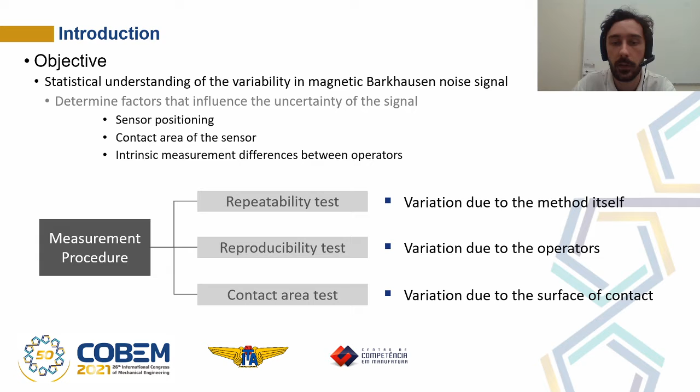But first, let us understand how the magnetic Barkhausen noise phenomenon and technique of measurement works. The phenomenon happens by inducing discontinuous changes in the magnetization of ferromagnetic materials under the influence of a continuously variable magnetic field. The output from this effect, which is the signal strength, is directly affected by the hardness and residual stress of the material being evaluated.

So the Barkhausen noise technique is emerging as a highly capable method of evaluating microstructural parameters in real time due to its non-destructive characteristic. Then there is a real need for a quantitative understanding of the correlations between parameters that influence the Barkhausen noise signal that are not correlated to the material.

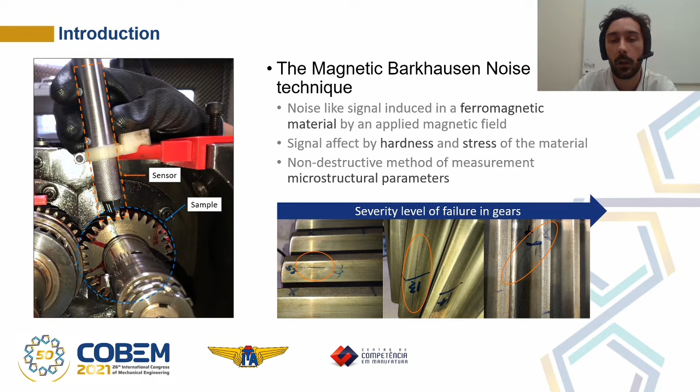In the current days towards which the automotive industry is heading, electric vehicles are gaining the spotlight, and with them, new drivetrain concepts are needed to overcome the challenge of system efficiency, noise, and vibration. Additive manufacturing may be the solution to overcome the limitations of conventional manufacturing processes, with its benefits of geometric freedom and new material possibilities.

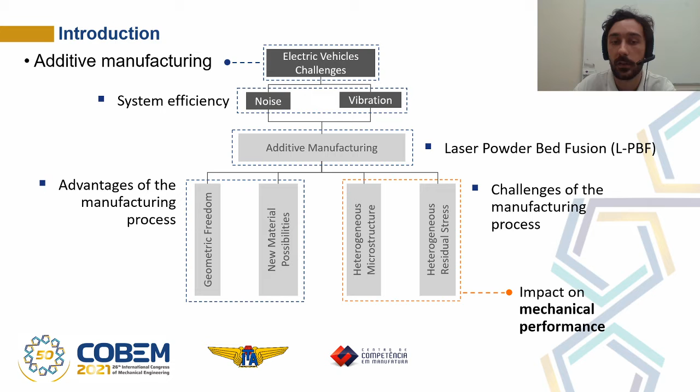However, additive manufacturing processes such as laser powder bed fusion induce heterogeneous microstructure and residual stress that may impact the mechanical performance of the components.

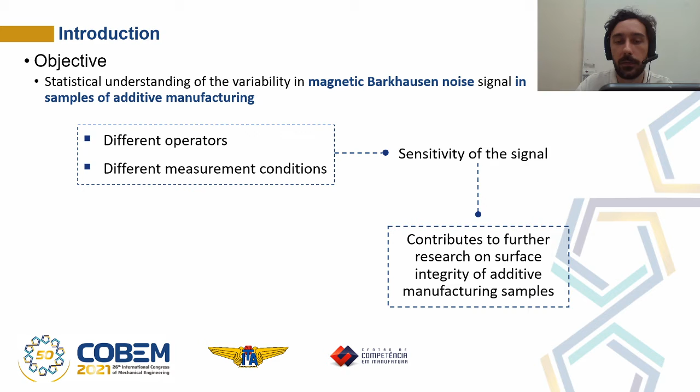The present study, therefore, aims to study the main parameters that influence signal strength, comprising an analysis with different operators and different measurement conditions. Repeatability and reproducibility tests collaborate to increase the spectrum of non-destructive surface inspection solutions, helping to investigate the robustness of the signal. Therefore, this study, which aims to analyze the sensitivity of the signal, also contributes to further research on the surface integrity of additive manufacturing samples.

I will approach the materials and methods section in a way that is divided into three parts. We will discuss the equipment used for the measurements, the samples used in the test, and the method of measurement.

First, the analysis requires the use of a Barkhausen noise signal analyzer and sensor, which is the Stresstech Rollscan. The equipment is used for controlling surface quality and investigating near-surface defects in terms of residual stress and microstructural changes.

The measurement process starts by inducing an alternating magnetic field, which tries to align the magnetic domains of the material in the direction of the field. This sudden change in the magnetization induces electric pulses, which are called Barkhausen jumps. These jumps are captured by the Rollscan, which amplifies, filters, and displays them on the device screen.

The range of the equipment settings used for the Barkhausen noise measurements include the waveform, the voltage and the frequency of magnetization, the filter of the signal, and the output is displayed in terms of the magnetoelastic parameter.

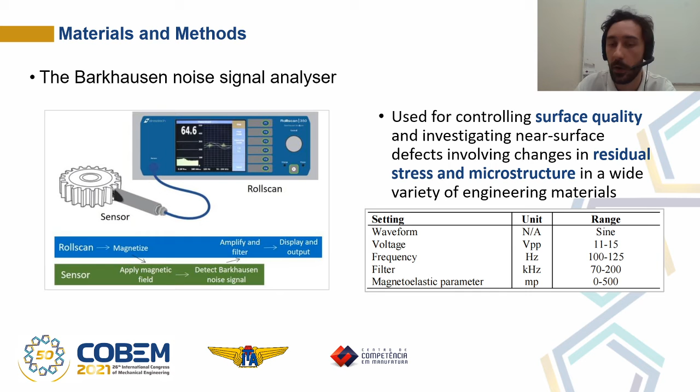With 3 specimens of additive manufacturing made with laser powder bed fusion technology, which are 2 rods and 1 gear, the spur gear used for the measurement has 21 teeth, 2.85 millimeters of normal module, 20 manganese chromium 5 is the material, and the metal powder has a median size of 29 micrometers. The 2 rod samples have a diameter of 9.53 millimeters and a length of 76.2 millimeters.

The laser powder bed fusion process was performed in the Alkimat LaserFunde200 machine with 200 watts of power, 550 millimeters per second of scanning speed, 0.1 of hatch spacing, and a powder bed of 100 degrees Celsius, a deposition angle of 14 degrees, and the filling strategy was islands of 5 millimeters.

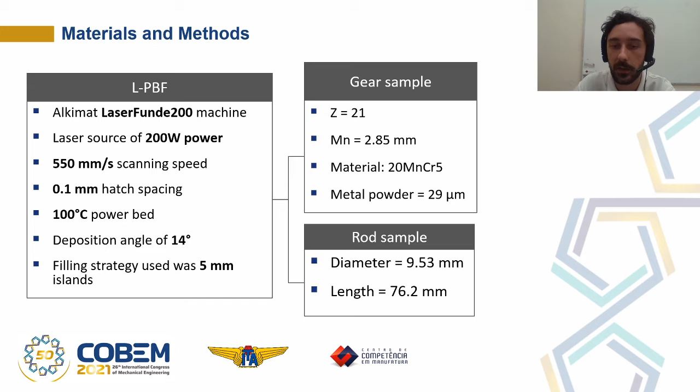In order to estimate the repeatability and reproducibility of measurements with the Barkhausen noise sensor, the experimental procedure was developed to observe the variation due to the measuring process when the operator measures the same part several times, and to observe the variation due to the operators by comparing the results of 3 different operators.

First, in the repeatability test, the operator measured the 21 tooth gear sample in 3 series of test repetitions, N1, N2, and N3. To also ensure the randomization of measurements, the order of measurement of the flanks was randomly defined for each operator.

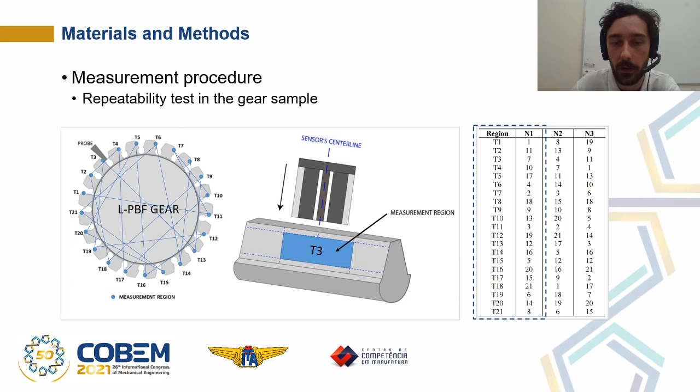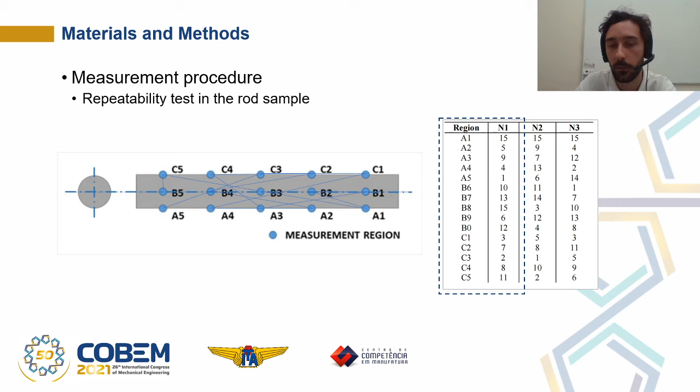Repeatability tests were also performed on the rod samples. The procedure followed the same logic for the 2 rod samples. Each operator had to measure the specific region 3 times in 3 series of repetitions, N1, N2, and N3.

The reproducibility test was developed to compare the variation of results between 3 operators. To achieve this goal, it was defined that each operator would perform 10 measurements on each sample in identical predetermined regions. 10 measurements were performed in region T2 on the laser powder bed fusion gear, 10 measurements in region B3 on the rod as built, and 10 more measurements in region B1 on the other rod, stress relieved, totaling 30 measurements for each operator.

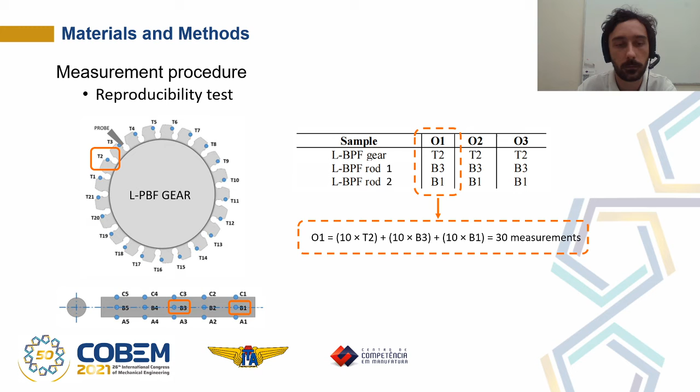To estimate the quantification of its influence, the sensor contact area was varied on a flat ferromagnetic surface to block its area of operation in terms of the ideal measurement area. The variation of the contact area of the sensor with the sample was performed as a function of the center line of the sensor. The contact was blocked using an insulating rubber-based adhesive tape.

For these tests, the contact area was varied as a function of the percentage of the sensor surface area in contact with the sample. These tests were divided into 100%, where the sensor surface area is completely in contact with the sample, 50%, 25%, and 0%, where the sensor surface area is completely obstructed by the rubber-based adhesive tape.

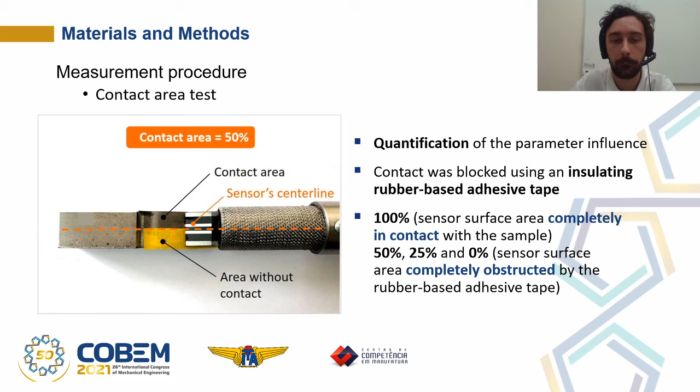The radial graph illustrates the geometry of the gear, and it can be seen that not only are there points with greater signal divergence between the three measurements, but also regions of the sample with different absolute values.

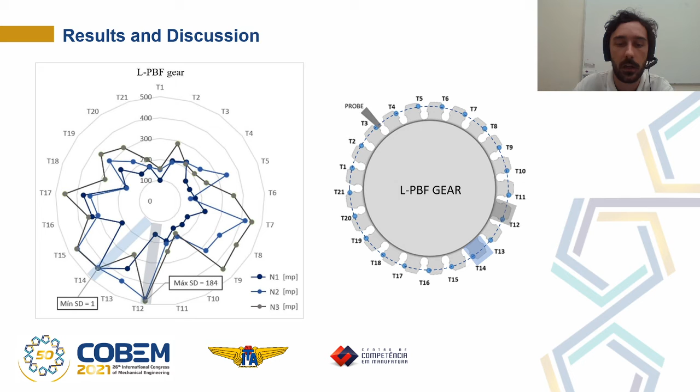The results demonstrate the difficulties of repeating the measurements on a complex geometry, as well as the metallurgical differences that influence the magnitude and variability of the signal. In the measurements performed on the gear, the largest standard deviation found was in the T12 region, caused largely by the disagreement between the N1 test series and the N2 and N3 series, which yielded close results.

For the results of the two rod samples, the larger standard deviation is caused by the divergence between the first series of measurement and the other two, showing the signal uncertainty even in a more controlled geometry.

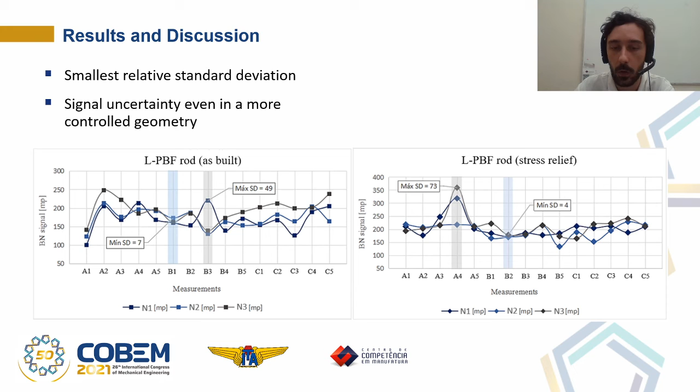But to better illustrate the results, the average of the repeatability test was expressed in terms of the percentage of standard deviation here. The first evidence of change in the sensitivity of the Barkhausen noise signal occurs when considering the presence of involute geometry on the flank of the first sample, whose signal sensitivity was 20% higher than in the rod samples.

This fact demonstrates that factors such as the sensor's contact area with the sample surface and the positioning of the sensor itself can cause significant signal deviations in the results.

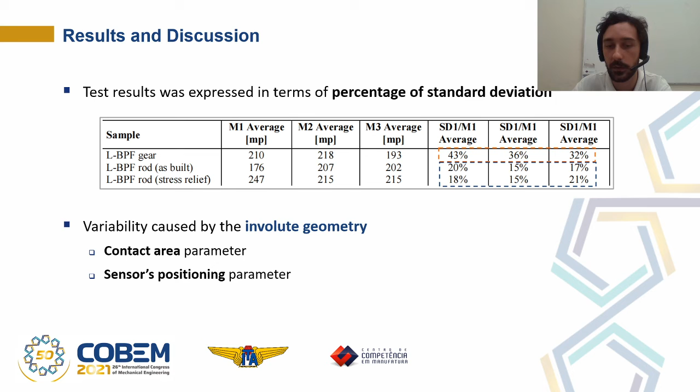Observing the results for each operator, it can be seen that the greatest variation of the signal in the sample with involute geometry is a trend, showing the difficulty of measuring due to geometry.

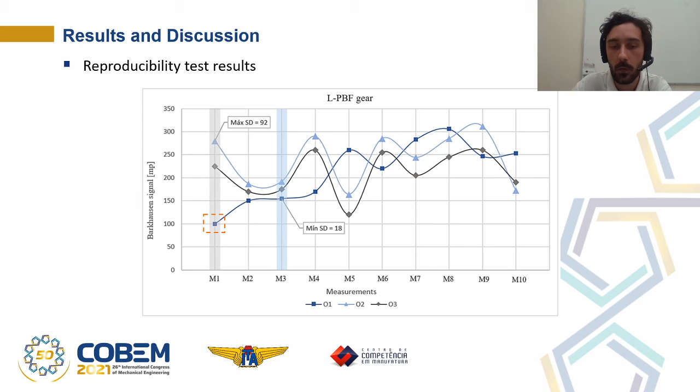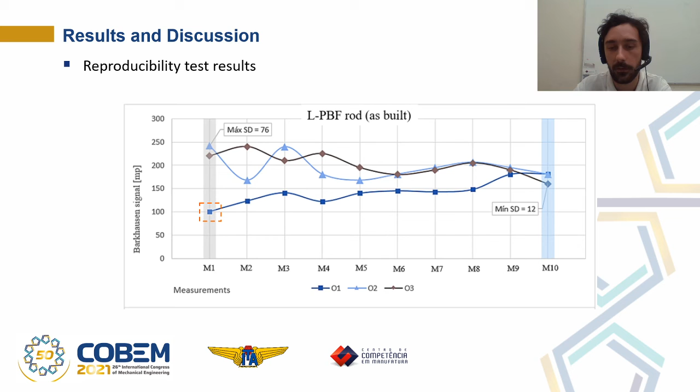The maximum value of the standard deviation for the gear sample is 92, and the minimum value of standard deviation is 18. For the first rod sample, there is a divergence in the first measurement for one of the operators, and the maximum value of the standard deviation is 76, and the minimum is 12. For the second rod sample, the minimum standard deviation is 1, and the maximum is 28.

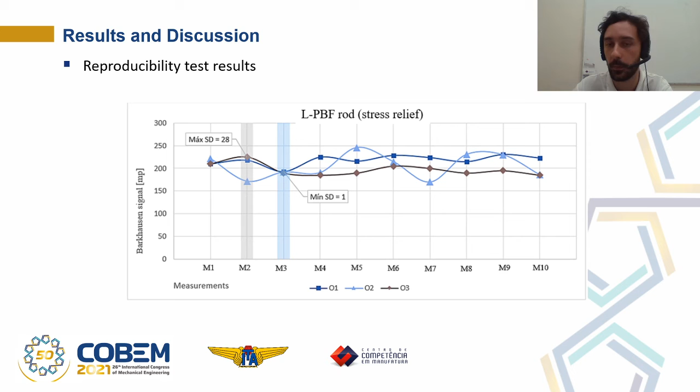This shows that surface geometry is a very important parameter when evaluating the statistical variation of the Barkhausen signal. Summarizing the results in three tables related to the absolute mean of the signal and the standard deviation, it can be seen that the rod geometry contributes to the signal having less variability, and it can be estimated that the variability of the gear contributes to the signal deviation being almost double that of the rod samples.

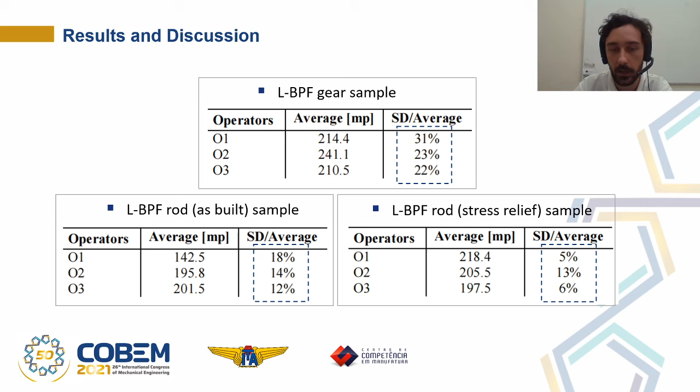When evaluating the average of the values as a function of the contact area of the sensor with the surface, it is noticed that the parameter directly influences the measurements in a strong, non-linear way. This is observed when comparing the values of the sensor completely in contact with the surface to the measurement values with the sensor completely blocked, whose value is not null, representing 56% of the total value on average.

So it is found that having control of the contact area of the sensor with the sample is a very important parameter, showing that the signal may drop in half when not having ideal positioning while measuring.

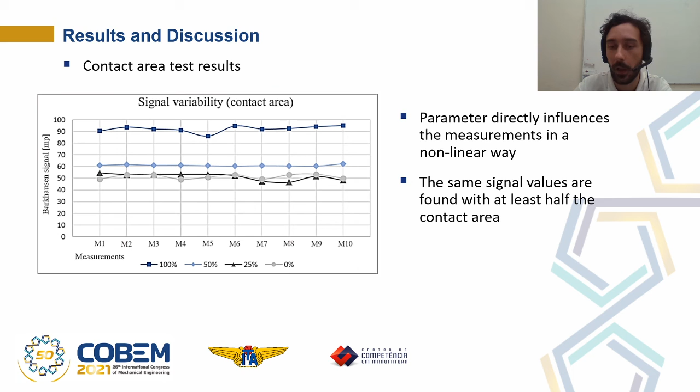For the conclusion of this study, three factors gained the spotlight when evaluating the variability of the Barkhausen noise signal: positioning of the sensor, complex geometries, and different operators. In the reproducibility test, an average difference of 16% between the maximum and minimum values was found between operators, showing that it is essential to certify whether the expected values for material failures overlap this tolerance.

Future work should propose the investigation of the Barkhausen noise signal combined with residual stress tests that will serve to demonstrate the signal difference found and perform a comparative analysis between parameters that influence the measurement, in regions of metallurgical divergence that also influence the Barkhausen signal.

It is expected that this study may allow future studies in the field of identification and investigation of gear failures using the Barkhausen noise technique. For the continuation of this study, new parameters that can influence the measurements will be evaluated in order to contribute to the Barkhausen noise method for early failure detection in gears.